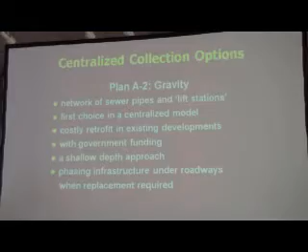A gravity system is often seen as the first choice alternative in a centralized model. It would be very costly, we found, to retrofit the existing zones 3 and 4. The original design of these communities, such as Southcott, were a decentralized system for individual treatments. With government funding, a shallow depth approach, and phasing of infrastructure under the roadways as they need to be replaced, would make this model for the centralized system more viable.

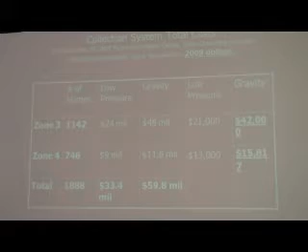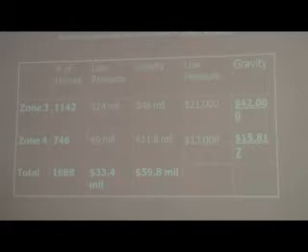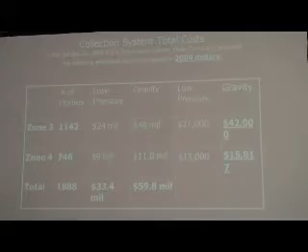Next slide. What I'm presenting here is some numbers that were presented to the community by Dillon and Associates on October 29th, 2009, in a public information center. We've extrapolated some of these figures, adding the number of homes, as you see down the second column, for zone 3 and 4, and two columns to the far right, which would be an extension of using the home numbers, dividing the low pressure total cost for each area, and coming up with a per household estimate. Please understand, to date, we have not received any accurate per household costing for zones 3 and 4. This gives you some idea.

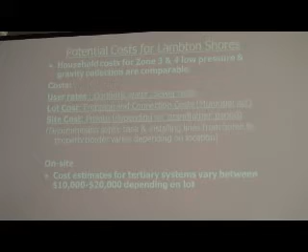Next slide, please. Elizabeth will go into the costing model in a little bit more detail, but I'd like to touch upon a couple of aspects. One of the things we found with looking at the different models throughout the community is that each property is going to have its own set of circumstances, not only will the zone itself.

We have found, however, that in the costing between grinders and the gravity system, there has been some work done in this area where they are comparable numbers, if the road surface is replaced at the same time. So I refer back to when we had made a recommendation that this be looked at when road surfaces are going to be replaced.

User rates for domestic water and sewage rates will affect everybody across the board, and it will be an ongoing cost to anybody on a centralized system. For a decentralized, or on-site system, that's not a factor.

There's two costs associated with the centralized system: the lot cost, which brings the piping to the lot, and then the actual site cost, which takes the piping connection into your home. So the lot cost is something that would be levied by the municipality. The site cost would be something that the homeowner would have to assume, because each lot would have a varied range of issues, whether it be your landscaping, your driveway, connections, the location of your discharge out of your home. Each one would have a unique circumstance. We've seen some pricing and some modeling of this by Dillon in other areas of municipalities.

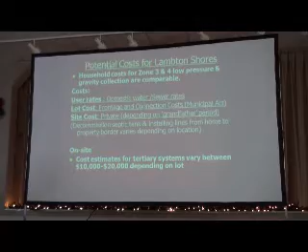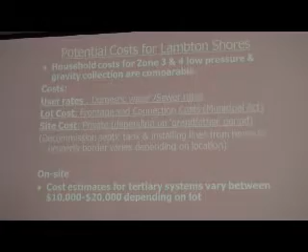And in closing, what I'd like to say is that we have done some estimating of costings for tertiary systems, which are now being managed by the county as far as under the building code for installations. The cost ranges from $10,000 to $20,000, depending, once again, on site demands and conditions. Next slide.

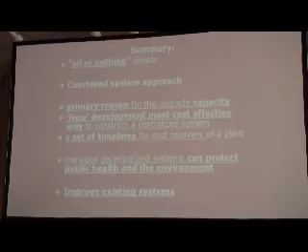We found that this discussion between the two models, centralized and decentralized, has unfortunately become an all or nothing debate. One of the things we found is that because of the demographics, where there's a high demand in particular areas of our community, and a very low demand over the season in other areas, there's room for both models. We find it cost effective, we find it beneficial, and we find it environmentally sensitive.

This is the two, the centralized and decentralized models. The other thing we find is, one of the primary reasons we've seen this desire for an upgrade of the existing STF is for capacity. We believe, we support the development in this area, but we believe that the most cost-effective way to construct a centralized system with a collection system is through new development. The other issue with the development is setting of timelines upon that development so that we know what to expect for cost recovery as far as the capital expenditure on the plant is concerned.

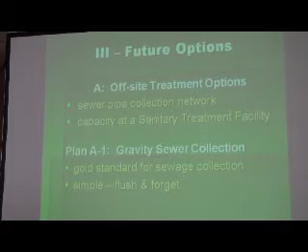I'm back again, being team leader for the topic of future options. I'm going to cover a little bit of what Ernie discussed because it melds in, but I'm going to discuss it in a different vein. Basically I'm going to look at the off-site options that he talked about, the centralized system, and the on-site options, essentially the septic tanks.

Starting with Plan A, which is the off-site treatment options. This requires two very expensive components: one is a sewer pipe collection system, and secondly, the capacity at a central sanitary treatment facility. What are the options for a sewer collection system? Those Ernie touched on. The first one is what I call Plan A1, a gravity sewer collection system.

Talking with various engineers in other municipalities, this is the gold standard for sewage collection. You always plan for a gravity system, primarily because it is a very simple system, requires no hydro, everything moves downhill, simple, flush it and forget it. The municipality will take care of the rest.

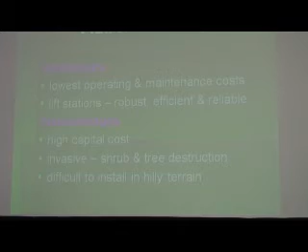Some of the advantages, the upper one, are the advantages to a gravity system: it has the lowest operating and lowest maintenance cost. The only big draw on this is you have to construct lift stations, but generally these lift stations are very robust, efficient, and quite reliable. Disadvantages to a gravity system are its high capital cost. It involves trenching the roads and putting in these lines that have to, of course, flow downhill. It's quite invasive.